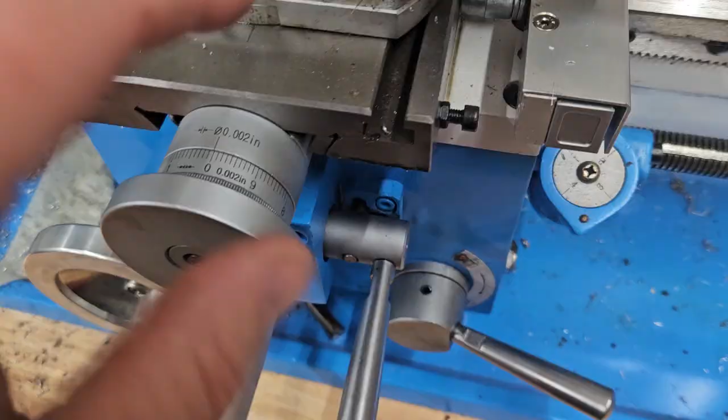Okay, gang, excitement times here. So I went ahead and I finished up machining the cylinder for the Efco 165. And the way that I was able to do that is I just took my table and locked it down, and I just used the XY function. You know, I got it close enough to where the only thing that I needed to use was this and this. The big table, didn't use it.

And so now that I've got this one done, I don't know, I might wait. I got a 372 clone project coming up, and I might just go ahead and wait until that one is done before I tear down my machine and figure out what's wrong with it. But whatever. Hey, I think that maybe I found a magic thing.

All right. So the 162 cylinder on my 165. What's the difference between a 162 and a 165? 1 millimeter in stroke. I think that's it. The 165 has a longer stroke. That's for certain. All right. They both have a 48 millimeter bore. The 165 has a 35 millimeter stroke, which gives you, let's see,

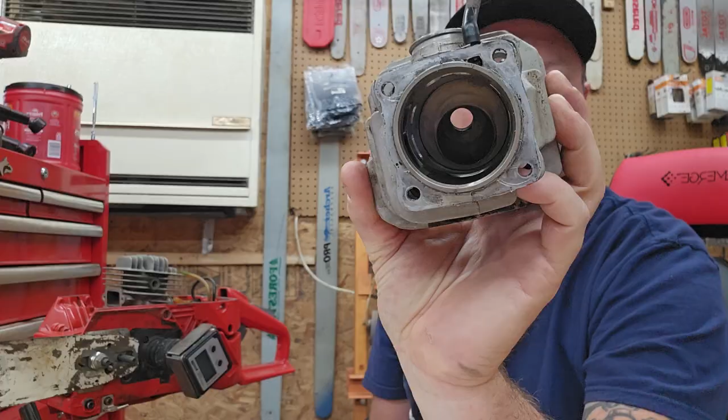You could very easily cut a pop-up in that and all kinds of stuff, even though the 165 has a staggered chamber. So cutting a pop-up in there wouldn't be easy because it's not centric. Centric, is that the right word? So anyways, I've got all the machine work done, and I've got it timed out to, you know, just simply where the numbers fall.

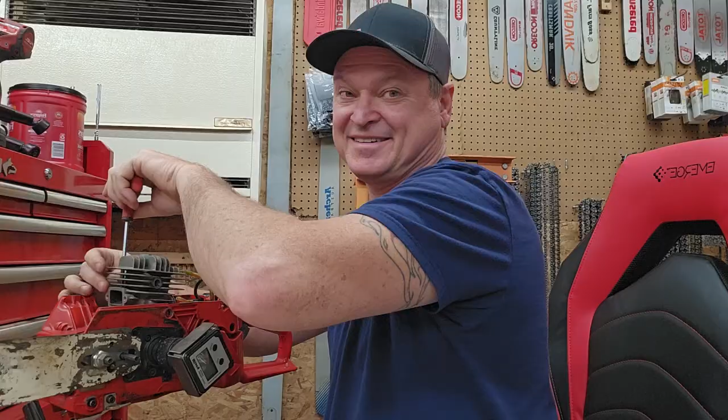I have not ported it yet, and that's not the word, because that truly implies that I'm going to port it. I might just stop with the machine work, right? And I want you guys to give me your info on that, what you think. So let me show you.

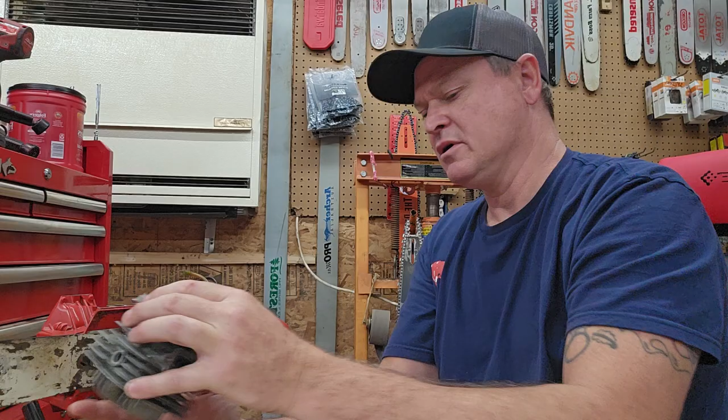Up in there, the chamber, now this is a 162 cylinder. The chamber on the 162 is centered, right? It is not off to one side, the front or back. It's centered. And we have that cut at a 10-degree angle, all right? Now this, look at me, I'm getting all excited. There we go. This is the Jonsered piston, right?

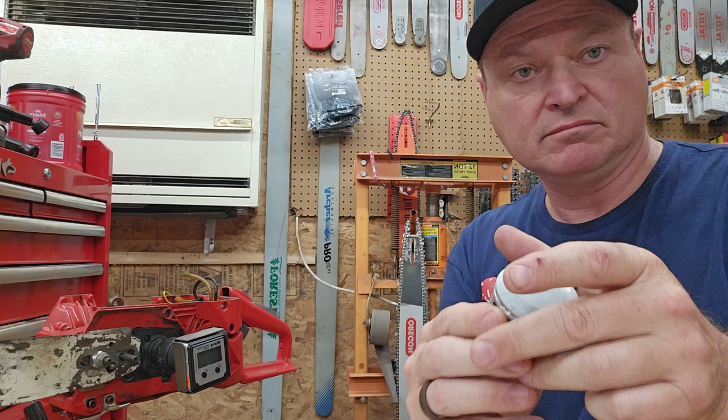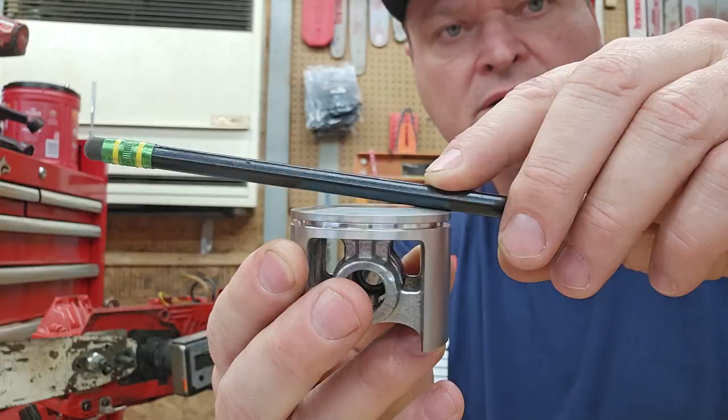And it has 10-degree, can't even see it. It's not much at all. This will show you. There it is. That's the angle right there. You got a 10-degree angle on this, right? Freaking flies.

So the reason for doing that angle means that it drops the piston crown down further, right? Yet you still have material that's coming up and going into your combustion chamber. So you can do two things with these taper-topped pistons, all right?

And this is why the guys that are building the really fast stuff, firewood saws, are oftentimes going to tapered now. It's kind of like the hot thing to do, right? Because what has been figured out, not by me, I'm just following along, is that this allows you to have like a pop-up, but there's no pop-up. So it's a smooth transition. Builders don't like pop-ups usually because it's a step like that, and it screws up your flow. This has more even flow.

So it allows you to get up in there in that combustion chamber and get your compression that you're seeking, while at the same time dropping the height of the piston itself, which means that your transfers will open sooner without you having to raise them. We don't want to touch the transfers if we don't have to.

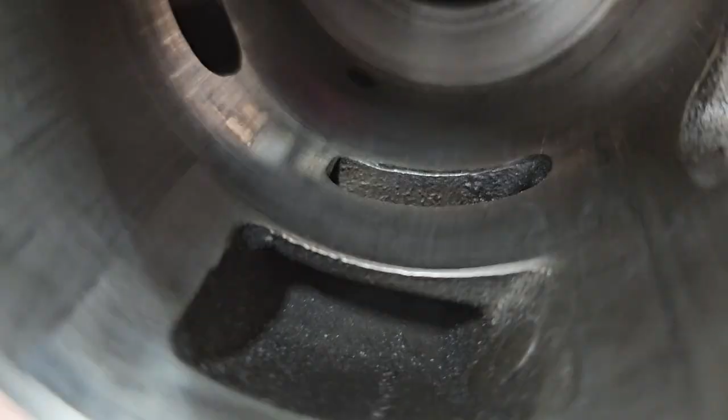Until you start getting into some of the Chinese stuff and they have this really terrible flow going on. But this has very nice transfers. Let me show you. It has really nice, really small transfers, and they're nicely textured, not overboard. They're just right. All right, so I don't want to touch them unless I have to.

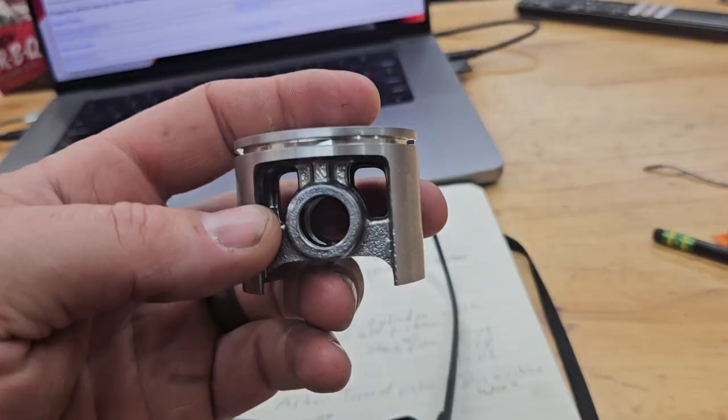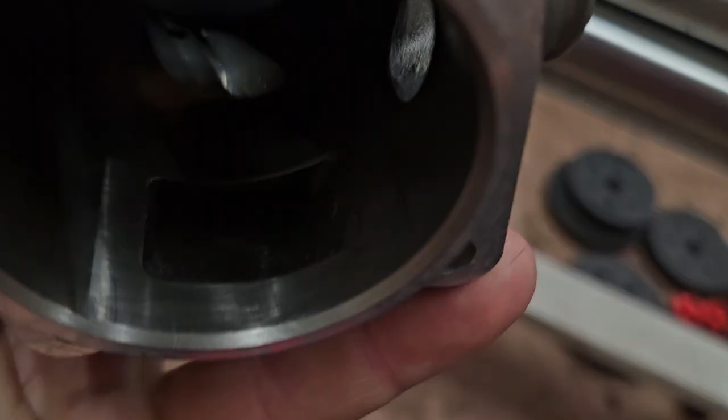Now the bottom transfer, I might need to touch that up a little bit. I haven't checked yet, but I might need to touch it up so that it lines up perfectly. Sometimes that piston goes so far down that the bottom transfer is being closed off by the piston, and you want that open as long as possible. So a lot of times what you have to do is, that sealing right there of the bottom transfer, you raise that to match the

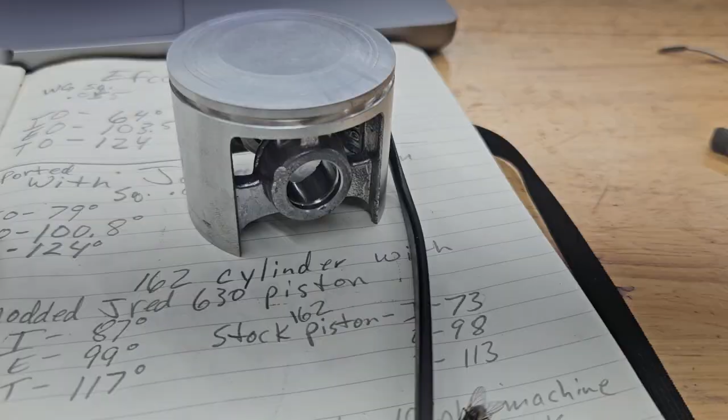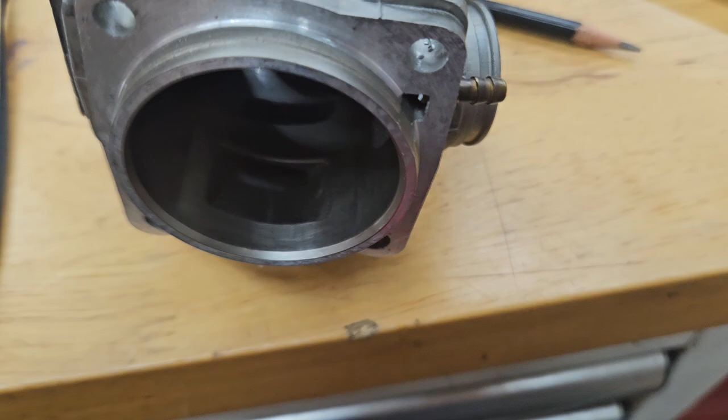openings on the piston. You can see where the stock piston stopped right smack at the top of that. Now with this new Jonsered piston, it might be stopping. Let me see if I can do this. I'll have to check and see, measure it out.

Damn flies, they came back. They came back.

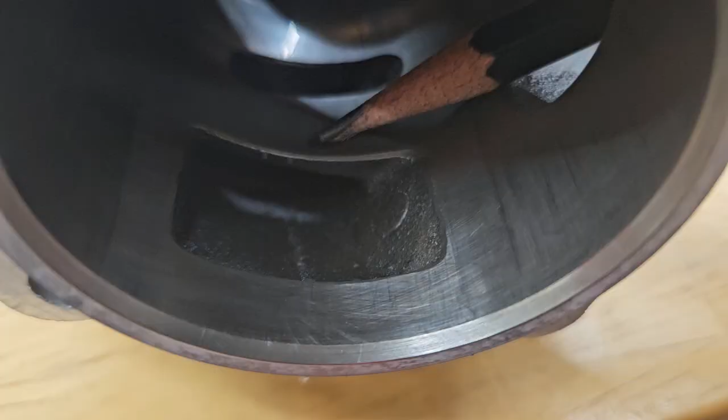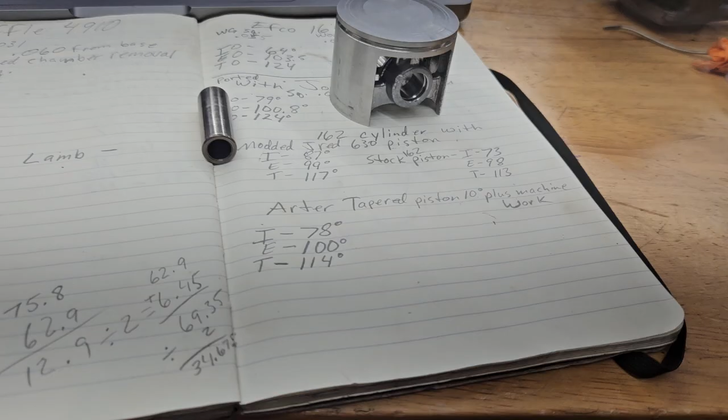If, let's say, we're stopping right there, well, then that bottom transfer, you cut in there and you raise that up to meet where the piston stops. Also, might want to widen that a little bit. Maybe not. We're going to see how this goes. But it's looking like I'm not going to have to touch the upper transfers at all, which is exactly what I want because these are my numbers.

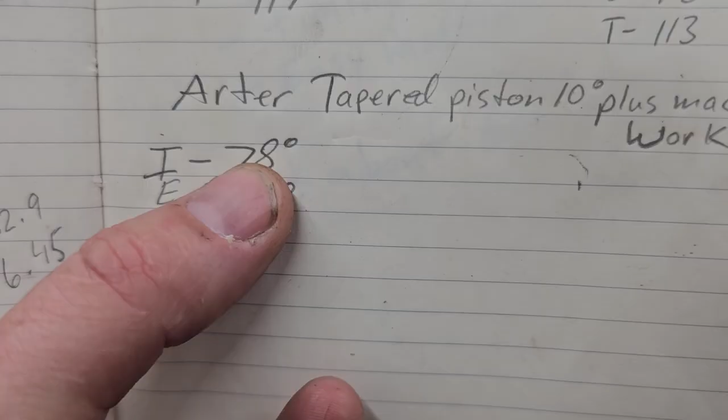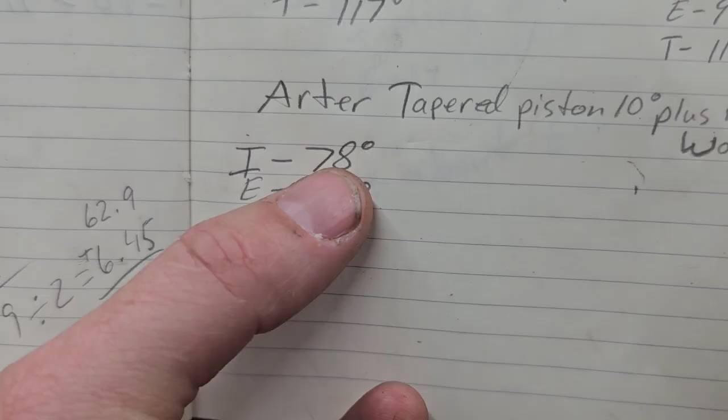All right. Look at that. Arter tapered piston top plus machine work, the intake is at 78 degrees. At least for now, I can totally live with that. That's a good number, but I might be doing some work on the carburetor, and that's just perfect. The exhaust, we're at 100, so we are going to raise that up a lot. And then the transfers are at 114, which is why we're not going to raise that up a lot.

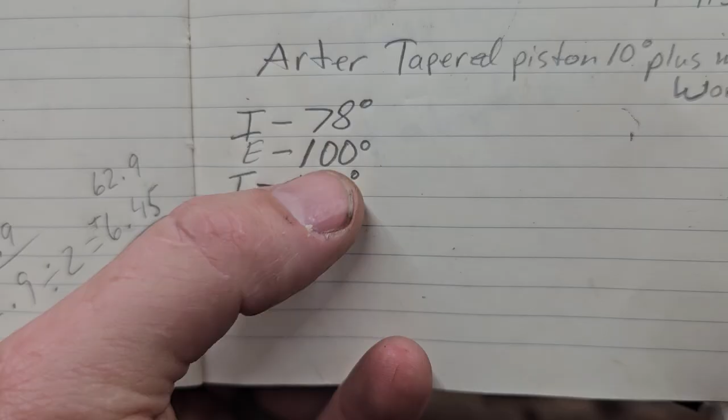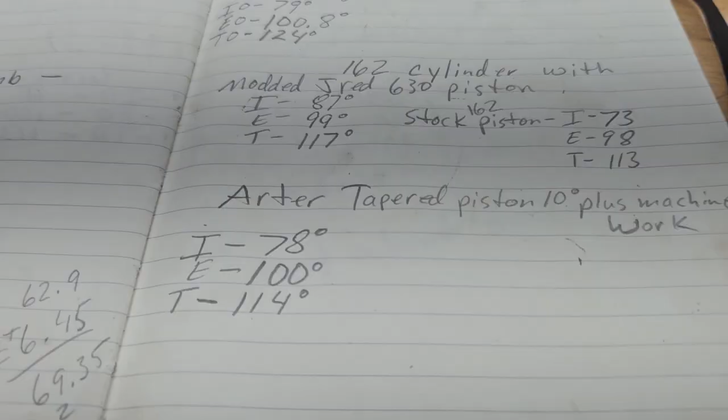All right, could it run there? Absolutely, and it would probably run good. But I think I'm going to try and push the limits with this saw and get it to run fast. Not just good, but fast. Now, that 78 degree intake, I want you to remember that. So, let's see if I can get this all out, because it's difficult to organize it in my own head, let alone actually speak it out to you guys.

A 78 degree intake is, typically speaking, excellent intake timing for a work saw, right? And a lot of times with these hotter saws, what people tend to do is they lower the floor of that intake, which means it opens sooner. Let's say opening at 82 degrees. Well, this can be very good. It gives more time for that carburetor to flow into your crankcase and fill it up with your air and fuel mixture.

However, for every little amount that we change that and we open it longer, we also are minimizing the amount of time that we have when that piston comes down and begins to pressurize our bottom end so that it can flow up above to the top of the piston.

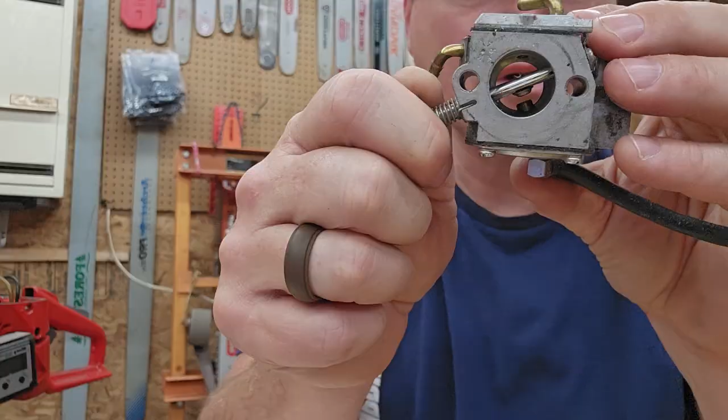Well, what I noticed with these Efcos is they've got a pretty small little carburetor. They do. And I don't know if you can tell, but it's not very big. I believe it is an HDA, HDA 2250. It is an HDA carburetor, which means it's extremely similar to a 357 XP carb. And so I grabbed a 357 XP carb.

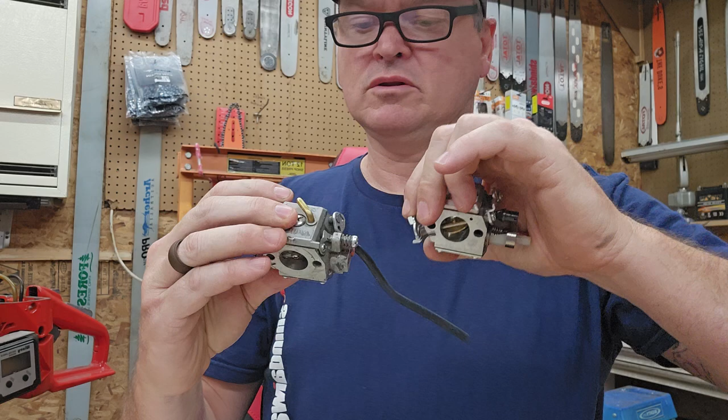Where's it at? Where's it at? That's 590. There. 357 XP carb. Let me see if I can hold these open for you so that you can see precisely what's going on. Oh, this is terrible. Oh, this is madness. 357 XP carb, Efco carb. Probably looks about the same to you guys, but I assure you, it is not.

The Efco carburetor on the inside, the Venturi, tapers down. The 357 does not. And 357 is how many cc's? 56. 56 cc's, right? Which means it has a much smaller amount of fuel and air that it needs compared to the 63.34 cc's of this 165.

So, I noticed that the 162 and the 165 both had the same size carburetor. They're identical. So my guess is it's undercarbed, which is why it doesn't really want to get up there in those higher RPMs. Because if you switch out from, I was talking with Jake and Andy about this, right?

Your carburetor, let's say your carburetor, you have a regular garden hose, right? It has a finite amount that it can possibly flow, right? And if you go from 56 cc, we're going to call that a 3-gallon bucket, to a 63 cc 5-gallon bucket, right? But you've still got the same water hose. You can fill both buckets. It just takes more time to fill up the 63 cc or 5-gallon bucket, right?

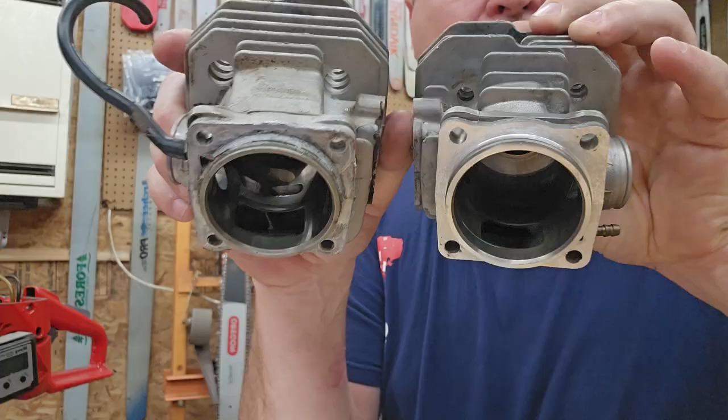Another thing that is a benefit, we keep going here, on and on and on, all right? The 165 has significantly larger transfers. Now, I know there's a bunch of bumblefuck hillbillies out there that think that transfers have to be big, all right? Now, they can really work in your advantage. I've seen lots of race saws with crazy huge transfers. As long as you've got a proper intake setup and carburetor setup that will fill up that big void that you're creating whenever you hog this shit out, then it's fine, right? Some saws can't do it at all with their carburetor. Other saws are just fine.

A great example of that is the Efco 4910. It's got plenty of carburetor to make that thing really scream up top. And so you don't have to swap that out whenever you do that stuff to the 4910. But on this one, I think what was really holding back the 165 cylinder was two things. One, it had more displacement than the smaller saws that came before it that are on the same chassis, right? And if it has more displacement, then you automatically need a bigger carburetor. But they were putting the same effing carburetor.

I think that even on the 156, which is 56 cc's, it had this exact same carburetor. And they used it for the 156, the 162, and the 165, which is bullshit. You need more carburetor. Your displacement went up. But also, their transfers got bigger. So literally, this carburetor was completely incapable of sustaining higher RPMs, because you've got a bigger bucket that you've got to fill up. Their standard water hose ain't going to work.